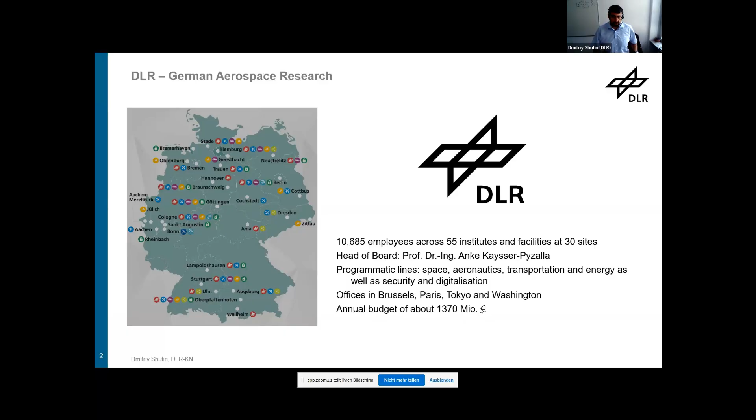But these are kind of the main directions in which we do research. We are, of course, primarily located in Germany. However, we have a few offices that represent our activities also in Brussels, to have a better connection to the European Union, Paris, Tokyo, Washington, and we are effectively a government-funded research organization. We do have some third-party funding, but the main lump of our funding comes from the German government.

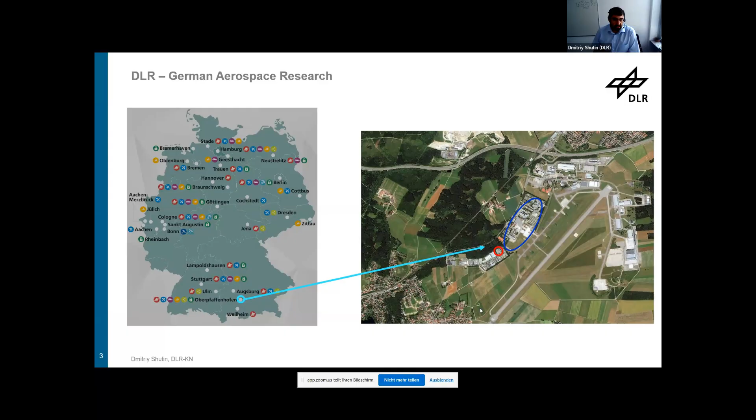My institute is located in the south of Germany. We are very close to Munich. It's in a small village called Oberpfaffenhofen, but basically it's the Munich area, and it's one of the biggest research centers within the DLR. On the campus we have

6 research institutions and a number of scientific technical facilities that provide services to different operations. For example, the German Remote Sensing Data Center is located at our premises. As you can see from the image, there is a small airport from which we also operate our research aircrafts, the Galileo Control Center, the Competence Center for future Galileo systems, and so on. So it's a relatively big research center in the south of Germany.

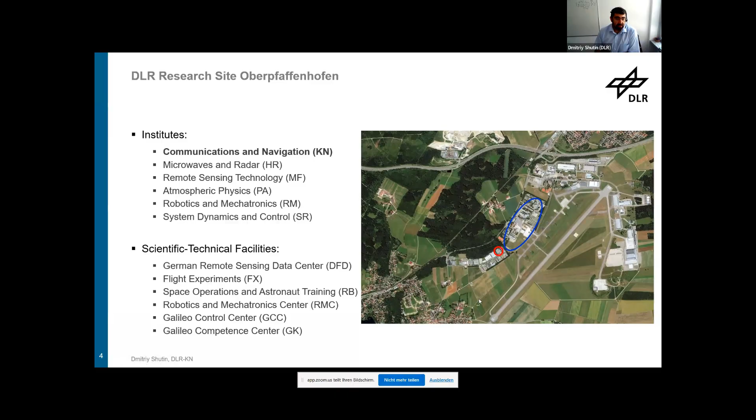Our institute is not the biggest one, but we still have around 230 employees, most of whom are doctoral students and researchers specializing effectively in communication and navigation areas. We do a lot of fundamental research related to these topics, but also a big focus is on experiments, development of practical systems, and testing the systems in real life.

The four major topics on which we work cover, of course, communication, meaning global connectivity, satellite communication systems, development of new communications standards, cybersecurity, and of course global positioning and navigation systems, meaning basically everything related to satellite navigation, GNSS, mainly Galileo, but also GPS, BeiDou, GLONASS.

And one of the topics where we are particularly active is autonomy and cooperation. This is where my group is working. My group is called Swarm Exploration. We are working on developing swarm solutions for different applications, primarily in space and Earth-related applications, and recently security.

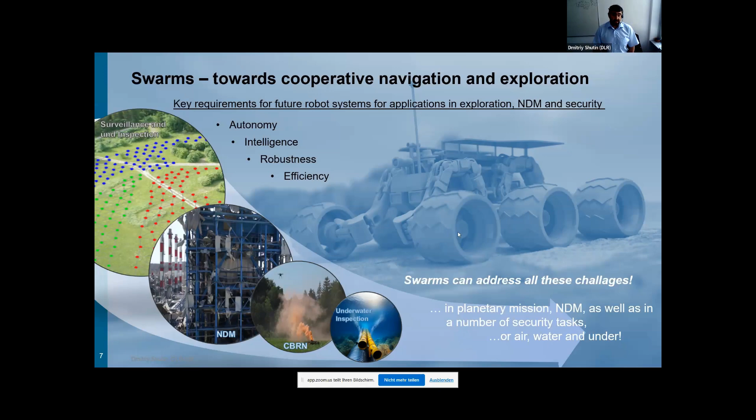So how do we come to source localization, gas source localization? This is one of the topics that we, among other things, look at in the group. And what is the idea, the purpose of this gas source localization?

Imagine a situation in which you have an unknown number of sources that release poisonous gas or smoke from forest fires that you cannot observe directly. You do not know how many such sources you have or where they are situated. But what you can do is take a robotic swarm, equip it with a number of sensors, and utilize the swarm to collect this data, process it in an appropriate fashion in order to identify how many sources we have and where these sources are located.

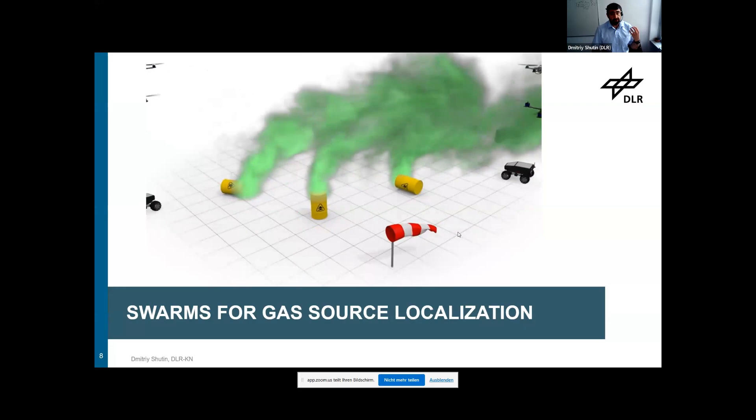This is a task that we set to solve, and this is the kind of approach that we also apply, for example, for exploring forest fires, trying to understand the possible sources of the forest fires, given the measurements that we can collect with ground sensors or flying robots.

So where can you use this technique? Well, of course, search and rescue, that's one of the applications. You could also apply it to monitor or enforce some regulatory constraints.

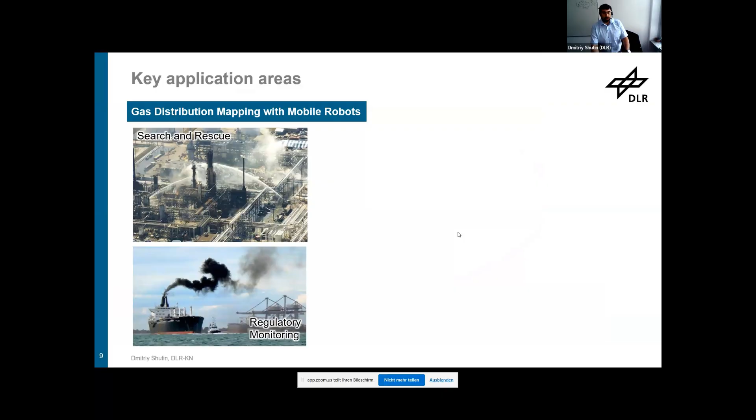For example, on emissions from the ship industry, you can really fly into this plume and take concentration measurements to identify what kind of fuel was burned, whether it's allowed fuel to be used close to the harbor.

Of course, air quality monitoring, especially during industrial processing. Scientific missions is very interesting.

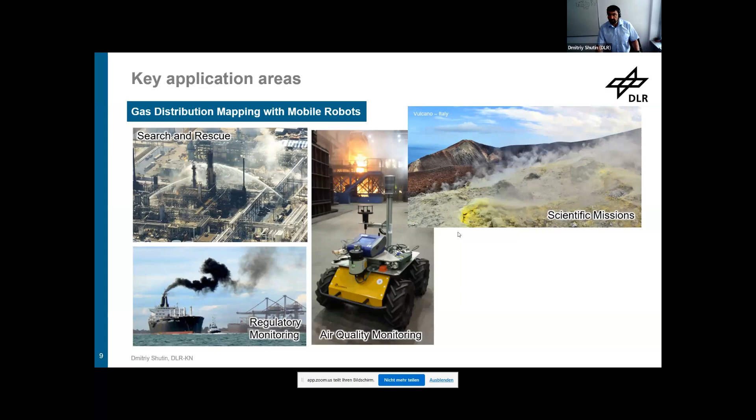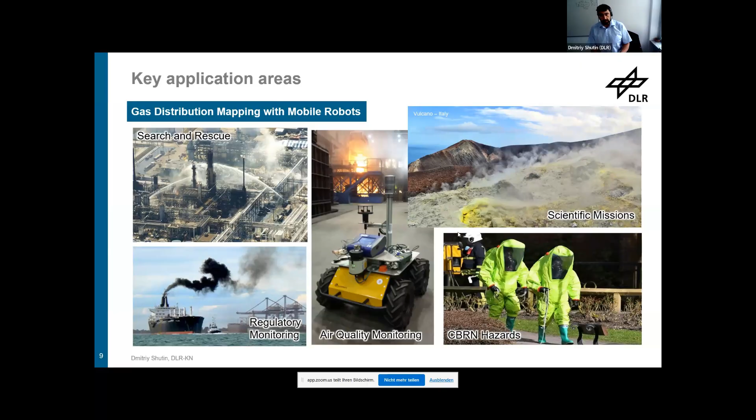And of course, security applications like chemical or biological events that might be dangerous to be explored by humans, but by robots it's actually quite a convenient solution.

How do we approach these problems in general? What is the general methodology that we follow to try to understand how the swarm should tackle or address these problems of source localization?

Well, the two main components that we need to make our system work is, of course, being able to collect measurements. So we need to have an accurate measurement system on the one hand, and on the other hand, we also need to have an understanding of the process that we explore.

Why is this needed? This is needed primarily because we don't have huge databases which we can use to do the training. We don't have the luxury of having a huge data set, or data collected in controlled conditions, with labeled information about the number of sources and their particular location. These data sets are simply not available.

No one has collected them. So we need to compensate this lack of training data by using essentially what we call domain information or prior information. This typically comes from expert knowledge or from physics that explains how these processes we're trying to understand or explore evolve based on universal laws, basically physics. So these are two concepts that are key to our processing.

Once we have the measurements that we collect with our robotic system and the process model, what we effectively try to do is bring these two things together. We try to understand how the model parameters can be identified or estimated based on the measurements that we collected. And that goes into effectively cooperative inference.

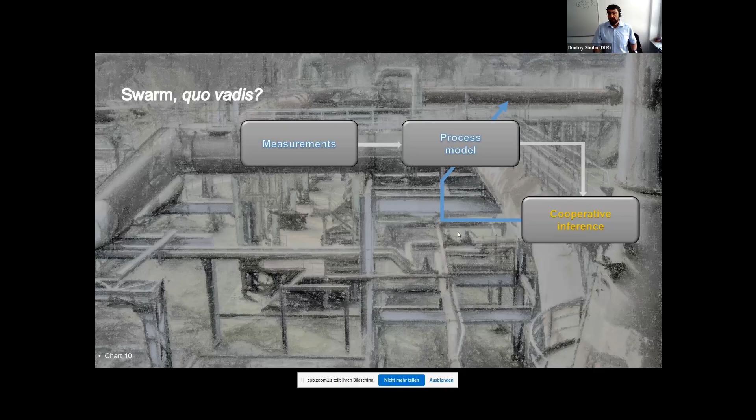We would like to rely on distributed information processing so that the swarm is intelligent on its own, without having one data collection and data processing location that would crunch the numbers. So cooperative inference is another element which is quite important for us. But we go beyond that.

Once we have this cooperative inference algorithm, we also ask ourselves how well we can actually identify the parameters of the model. This is one of the key elements which leads to what we call swarm exploration: how can we utilize the models and data we have collected to better understand what we do not know about the model or the process, given the measurements we already have. This is what we call uncertainty quantification, and you will see examples of how this uncertainty looks a little bit later.

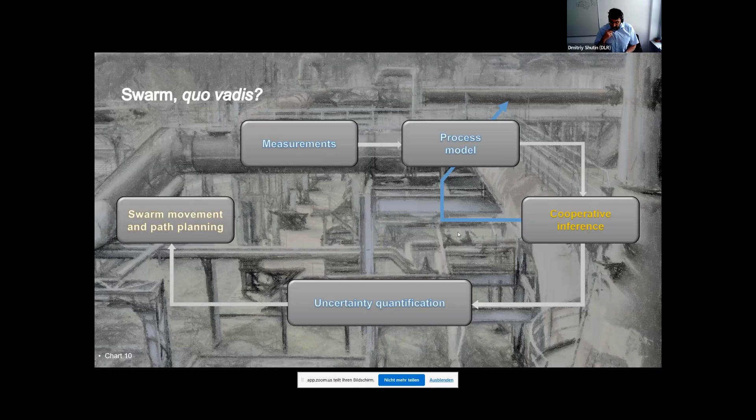This uncertainty quantification is actually the main input into what we call a swarm movement or swarm path planning algorithm, which decides where we need to collect new data, where we have to fly, so that we collect new measurements which improve our understanding of the process, giving us a better understanding of the parameters from which we can derive new uncertainty quantification, find new locations, collect new measurements, and this is how we proceed. This is effectively our key methodology.

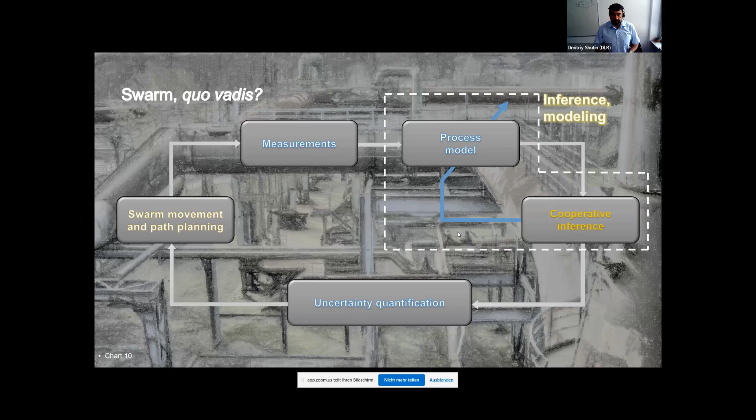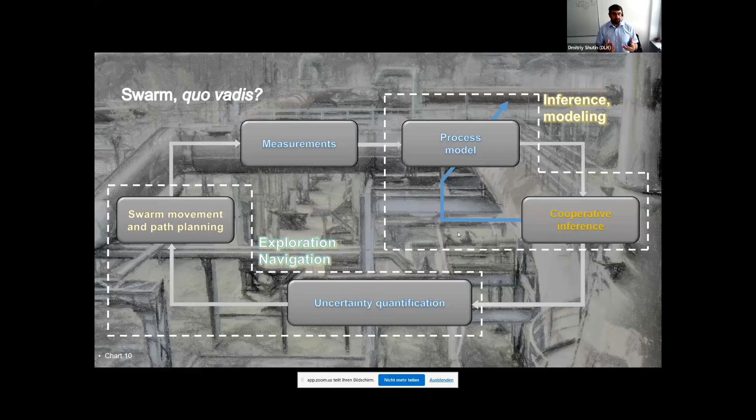This is how all the methods we develop operate on a very abstract level. One part of this process relates to inference and modeling. The other part relates to exploration and navigation. Today I will mostly talk about inference modeling, and lightly touch on exploration and navigation, but mostly focus on cooperative inference and understanding this process, because we are going to talk about sparse Bayesian learning and how to represent this process with multiple sources.

I would proceed with making this scheme, this methodology, a little bit more concrete, and I will begin with the first block, problem modeling. So how do we actually approach the understanding or modeling of source localization? As I said, we do not have a lot of data to train our model, so we need to rely on expert or prior information about the processes and the way we approach the model itself.

One of the approaches we utilize quite heavily in our work is the so-called physics-inspired or physics-based model of gas propagation. Effectively, we know that if we have a certain number of sources distributed in an environment, the distribution of the gas from these sources will be affected by two major factors. The first factor is the diffusion process.

A source effectively puts material into the atmosphere, into the environment — it can be a hot gas, for example. The hot gas expands, and due to temperature differences, that creates a Brownian motion, which is responsible for diffusion of this material into the atmosphere. So if you just have diffusion, you'll basically see a sphere of gas propagating from a source. That's how the gas would propagate from a source in the absence of wind.

Wind is a second, quite important element, which makes sure this gas is transported in a particular direction. In reality, wind is one of the key components describing how the smoke plume propagates. If you look at a ship leaving the harbor, you see the smoke plume coming from it typically goes in one particular direction — that's the wind driving it. Models describing such processes are called advection-diffusion processes, described by partial differential equations that you can see here.

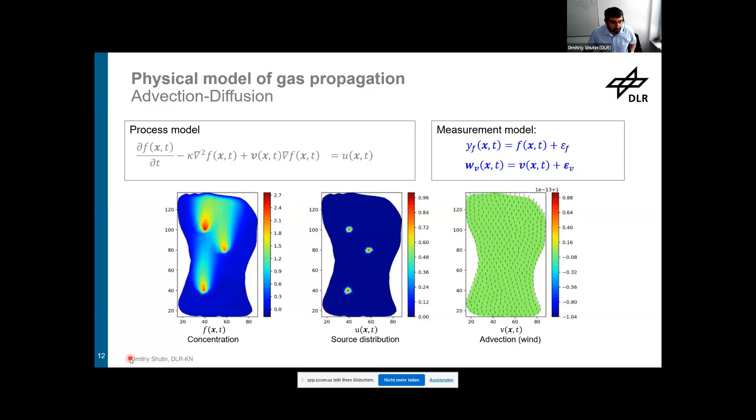Now, how are these measurements constructed? Well, as I said, we equip our drones or ground robots with the corresponding measurement sensors. It can be an in situ sensor, which is directly put into the plume. And this in situ sensor has a certain impulse response, or actually a point spreading function, that tells you how sensitive the sensor is to a particular location.

It's not necessarily direct — we often model it like this, but it has some sensitivity in space. It also has sensitivity in time, so this is not an exactly accurate model, but it's a very good approximation. So we have a certain model that tells us how we measure our concentration, and similarly we have a model that tells us how and where we measure our wind field. This is the measurement system we're using.

As you can see, we're having here a classical state space representation, right? So we have a dynamical model that describes the process change in space and time — that will be our dynamical system. And we have a measurement system that describes how the state, which is our concentration, is observed. So this is the two-layer setup that we will use to describe the process of interest.

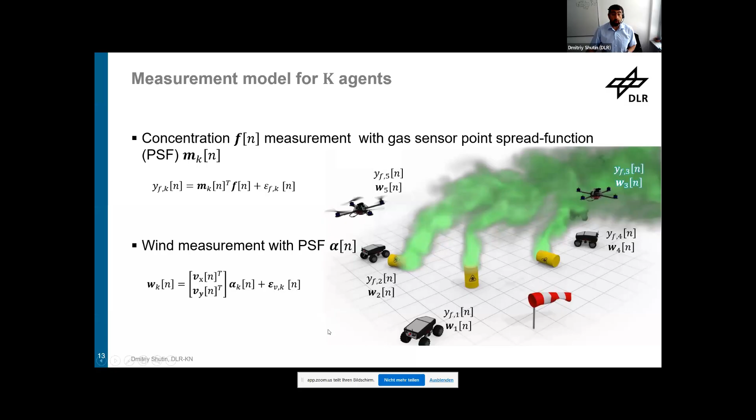How do we actually model the sources? This is our prime objective — we want to identify the sources that drive the whole dynamic process. One of the assumptions we put here is, first of all, let's assume the sources are stationary, so they do not drift in space or in time. This is a simplifying assumption that helps us relax our modeling.

It's not always realistic — for example, for forest fires, we know that the fire propagates, so the sources are moving. But on a time scale that is relevant for the estimation problem, we can treat the sources as almost time invariant.

So effectively, we say the sources, the functions that kind of drive the whole diffusion process, is just a linear combination of weighted Dirac impulses. Every delta here is a measure, a Dirac impulse located somewhere at location theta with a subscript L. So it's an individual source located somewhere in my space. The scaling of my delta impulse tells me how much material this source puts into the atmosphere, like a release rate.

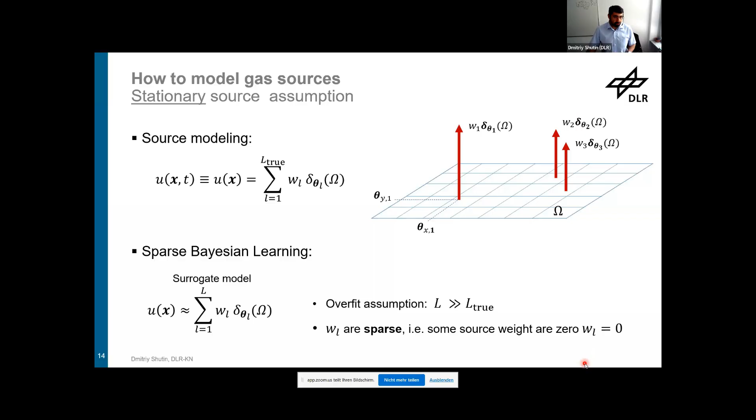So this is kind of an approach that we will follow. All right, so we have now the model, we have now the assumption about the sources. How do we proceed? Today I will talk about two principal approaches that we have tried to address this problem, to identify the sources and their locations.

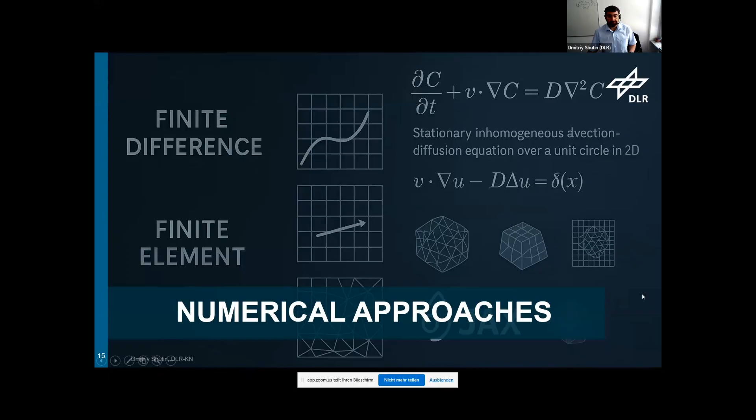One of the approaches is a completely numerical approach. It effectively uses numerical tools to deal with partial differential equations and the whole optimization and learning loops that I have shown before. Later, I will also talk shortly about analytical approaches that we looked at lately, and these turn out to be a bit more computationally efficient, although they bring slightly different types of problems with them. All right, so let's start with numerical approaches.

So here I will try to briefly go over the numerical approaches to solving differential equations. You might have heard that the standard way of dealing with partial differential equations is to use finite element methods. In essence, what finite element methods do is say, okay, I have my functions of interest that I want to estimate, like my concentration f, which is continuous in space and time, and my wind, which is continuous in space and time.

I have my sources, which are continuous in space and time. How do I deal with that? The first step is to say, okay, let us approximate or represent our function using some fixed and predefined basis set.

So it's very similar to a classical Fourier transform, where you represent your signal in time using a linear combination of Fourier bases. It's a very similar idea here, but you do not necessarily use Fourier bases. You use a different approximation or basis to represent your functions.

So the first step is you bring your PDE into so-called weak form. Instead of looking directly at the functions, you look at the inner product of your functions of interest with a function that is typically called a test function, which is selected. So this phi of x is something that you select.

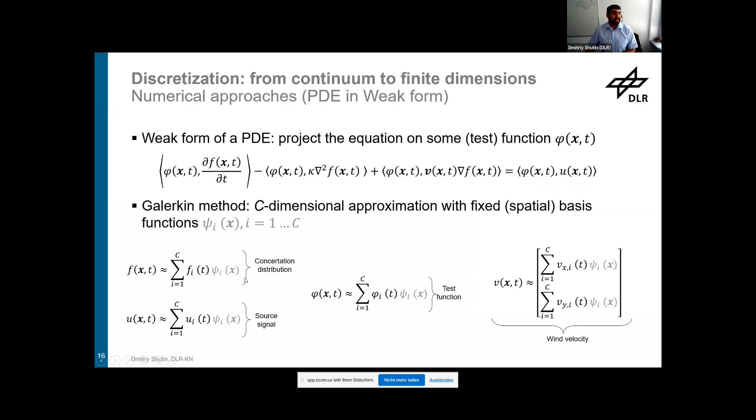The summation of these finite elements will, at the end, give you a reconstruction of the functions that you're trying to estimate. The unknowns in this representation are the coefficients, these time-dependent coefficients which represent a decomposition of your continuous function as a linear combination of these fixed finite elements. So the coefficients we are actually trying to estimate are these linear representation coefficients of our function. These are our unknowns.

And as you can see, they all depend on time. Let me jump back shortly. So we all have this time dependency, and time is still continuous. So these are still continuous time coefficients that are now discrete in space. So we now discretize the space.

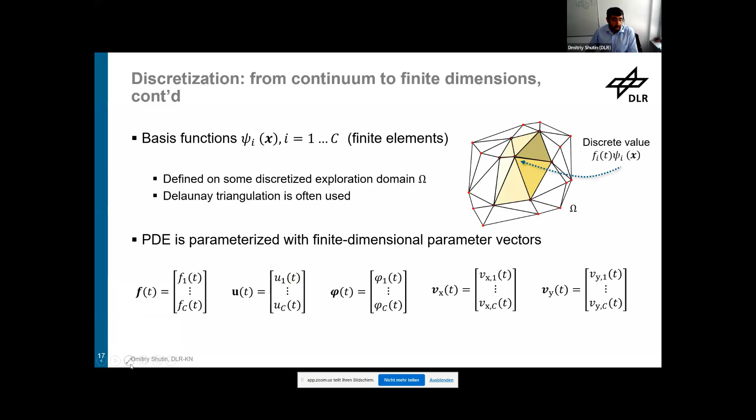How do we proceed? We come back to this weak form formulation where we have inner products between all our functions and the test function. If you write it down and plug in our approximation instead of the function, we end up with a discrete representation using matrices, vectors and matrices that represent all these inner products. We can apply this to all terms: the source term, the time derivative, the diffusion term, the advection term.

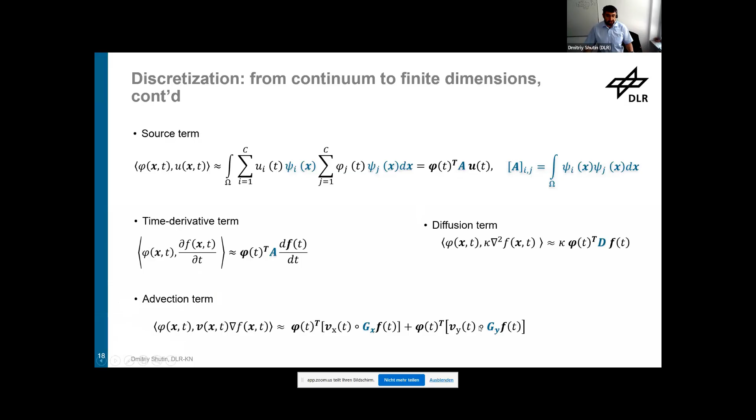We can do all these computations, and effectively we end up with an equation that is continuous in time but now discrete in space. As you can see, we have matrix vector products. It's a somewhat complicated structure, but at the end of the day it's just vector matrix multiplications. The final step is to bring it all into discrete time by discretizing the time. If we do everything properly, we end up with a difference equation that describes our advection diffusion now in a discrete domain.

So we now have a state space representation, which is no longer a partial differential equation, but a difference equation in space and in time. The vector describes our discretization in space, and that starts to look a little more like a classical Kalman filter state equation. We have a state at time n, which depends somehow on the state at time n minus 1. So this is the direction in which we are going.

And of course, we need to also introduce a boundary condition for the partial differential equation, which basically extends the state space with additional variables. But that's just a minor thing, not that important for our discussion. What is important is that we take a continuous equation in time and space domain and effectively bring it into a difference equation over a large state space vector, which describes our state or system in space now.

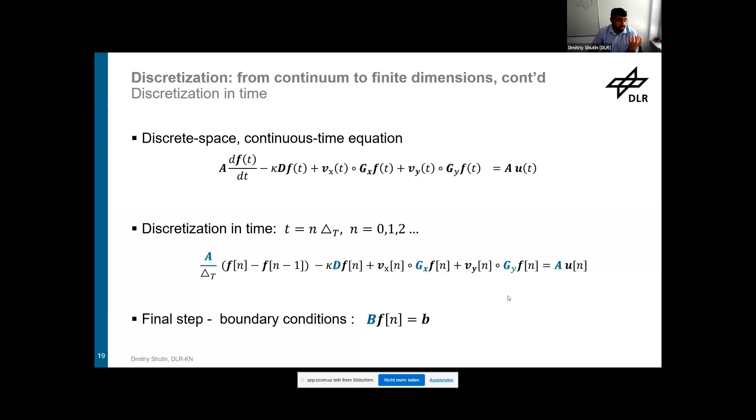So we now have basically a fully discretized equation. How do we proceed from there? Well, as I mentioned, we are going into sparse Bayesian learning. So how does sparse Bayesian learning work? It's a Bayesian approach, so we need to get rid of this classical standard deterministic approach and put everything into a probabilistic framework. How do we do that?

Well, first of all, we say our equation, so our advection diffusion or PDE equation, does not hold exactly at zero, but rather it has a certain residuum. So it holds approximately, and the residual signal follows a normal distribution.

So we say the concentration value that we obtain effectively describes a certain probability distribution. So it's a probability of our concentration, which is conditioned on the wind and the sources. If we know in which direction the wind blows, and where the sources are and how many we have, effectively we can just solve the equation by iterating it, and then we have a solution. It's a forward solver, quite simple. And if we solve the equation, we'll get our concentration.

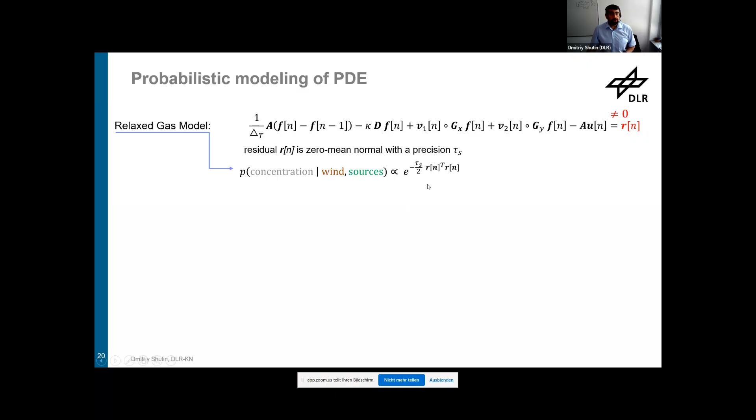But of course, the equation does not hold exactly, so we say that the residuum that remains is random. And that gives us our probability distribution over the concentration value.

Of course, we have measurements, right? So we have our robots that measure winds, that measure the concentration of the gases, and that give us effectively what we call the likelihood. So that's a probability of a measurement, which is conditioned on knowing the wind vector and the concentration. Again, that's given by our measurement equation.

And this is where the sparse Bayesian learning comes from. We need to also define the prior distribution for the wind and for our sources. So if we start bringing all the pieces together, we would like to estimate concentration, wind, and the sources given our measurement. So we would like to come to a posterior distribution of these unknown parameters given what we measure.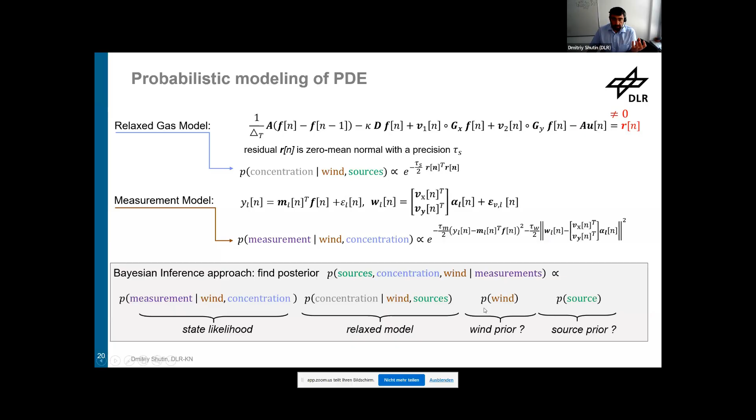And if we write down this posterior distribution, we see that it will actually contain a state likelihood, which tells how our wind and concentration impact our measurement. So that's our measurement model. We'll have our partial differential equation model now in a probabilistic context, which tells how the concentration probabilistically depends on the wind and the sources. And finally, we need to specify a little bit of a prior about the wind and the sources.

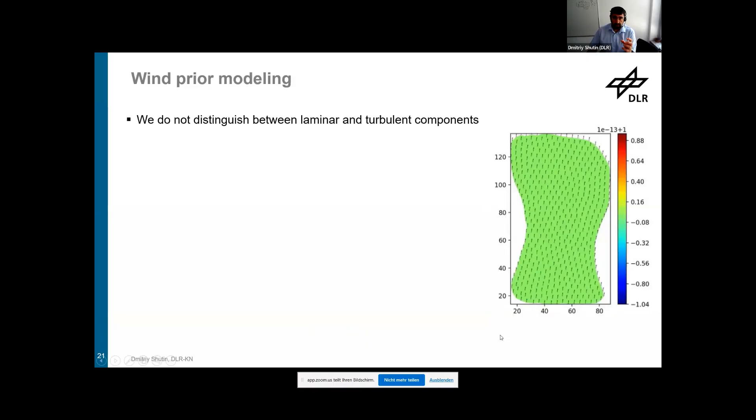So let us look a little deeper into that. For wind modeling, we typically follow a very simple assumption. We say, well, we first of all do not distinguish between laminar and turbulent components, which is a huge simplification, but we need to do that because otherwise we would also have to deal with the Navier-Stokes equation, and that would make our life really, really difficult. So we use a simplifying assumption by saying there is no turbulence.

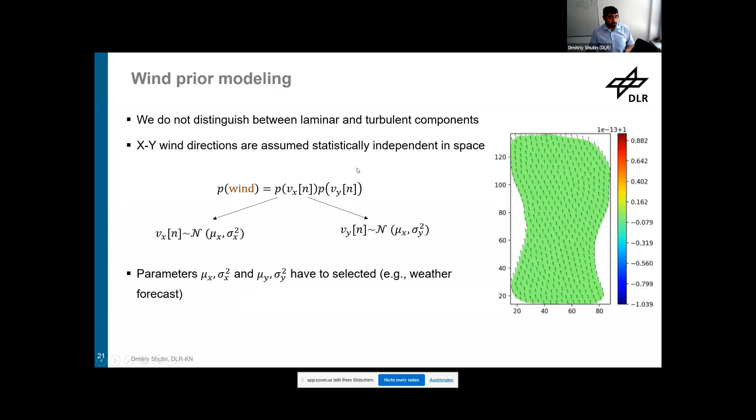And we also say that the X and Y directions of wind are statistically independent. This is one of the main approaches that we follow. The only thing that we need to know is the mean of the wind and its variance, and these are parameters that need to be selected for the prior. These can actually be obtained, for example, from the weather forecast. So we know the dominant wind direction, and we can use this information from the weather forecast to construct these priors, and in this way define the prior for the wind.

For the sources, this is where the sparse Bayesian learning comes into play. So how do we model sources? When we started with the discretization in space, we have a vector U, which describes where our sources are, and this is the discretization that we have chosen before. And of course, it depends on time, so we will have a vector describing sources that might change in time.

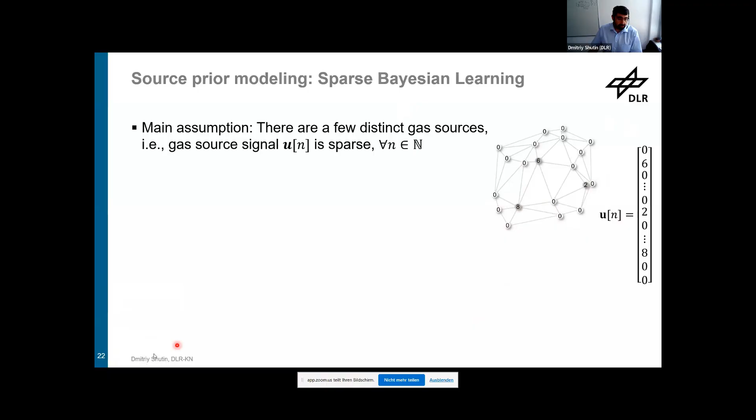So our main assumption is that we have a lot of sources, but some of them are non-zero, the rest is zero. This is what we call the sparsity assumption, so the source vector is sparse. That implies if we look inside this vector, we see a lot of zeros, and only on some locations are non-zero values, which you actually see here. This is a non-zero value, this is a non-zero value, these are all zeros, and this is another non-zero value. So we have a vector with n components, a very large vector describing the whole discretization of our spatial domain, but there are only 3 components that are non-zero. So this is how we model it.

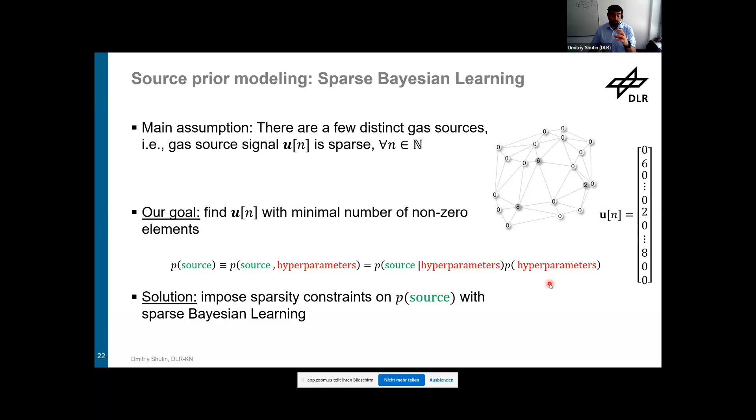Our goal is to identify which components will be non-zero here. Sparse Bayesian learning does this indirectly by introducing a hierarchical prior that will result in an estimate that is sparse. This is done by introducing additional parameters called hyperparameters. These hyperparameters control the contribution of a source to the model, so it's actually these hyperparameters that decide whether we have a source or not. This hyperparameter will have a strong resemblance to a detector. Effectively, its value will tell us whether the source has to be set to 0, meaning there is no source, or the source is non-zero, and then we'll have a value that we will use as an estimate of the source release. So this is how sparse Bayesian learning operates in order to identify which sources are relevant for us.

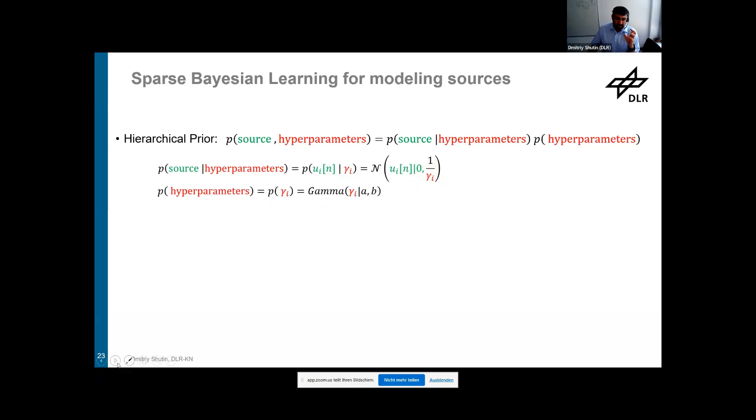Let us look a little bit more into detail on how sparse Bayesian learning works. Effectively, we construct this hierarchical prior, which consists of two contributions. One is a Gaussian contribution, which says that the source value given this hyperparameter gamma is a Gaussian with 0 mean, and it's actually a variance, not 1 over gamma. It's just gamma times I, which is the variance of this parameter. And this hyperparameter itself follows a gamma distribution. It's a slightly strange combination, but if you look at how this hierarchical prior actually works, or what is an equivalent prior that you use, you can marginalize over gamma, and you find that this is actually a Student's T distribution.

What is important here is that if you look closely, it actually looks a little bit like an L0 norm. If you plot an L0 sphere, you would see that it's a pure cross. An L1 sphere would be rotated, it would be a rhombical structure, so it would go basically like this for L1. The Student's T is something in between, so it's a kind of distribution that places probability mass along the axis, and that's what will effectively make the estimator sparse.

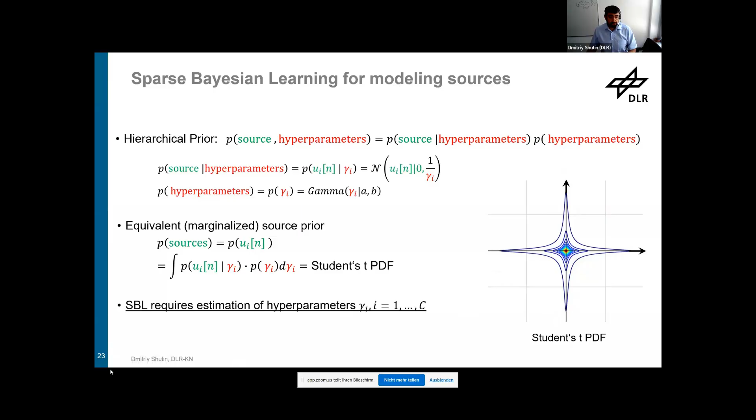And that's typically the solution you get if you use a pseudo-inverse in MATLAB, or ridge regression in Python or MATLAB, doesn't matter. That's the solution you would obtain with ridge regression. As you can see, it is not sparse.

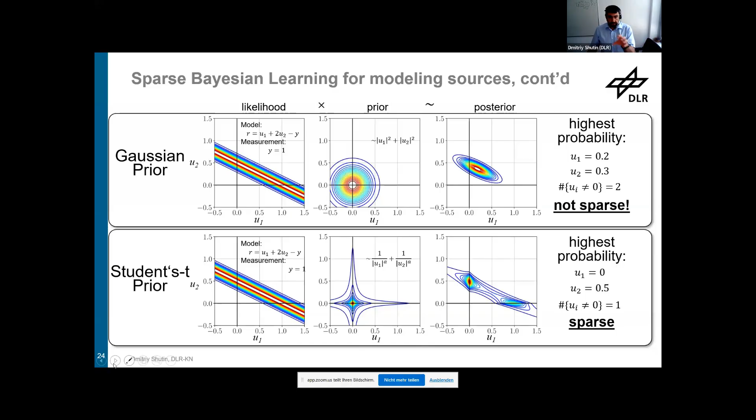So this is the kind of approach we are going to use, and why sparse Bayesian learning can be used not only to obtain a sparse solution, but also to identify how many sources we have.

So now let me walk you briefly through the estimator. Of course, we now have a lot of parameters that we want to estimate. We have the sources unknown, we have concentration that is unknown, wind, hyperparameters, only given measurements. And all these parameters are given by the corresponding probability density function.

So the model fit is given by our measurement equations. The model is our PDE, sources, and hyperpriors - things that we have just defined.

One approach to model this system is to use the classical hidden Markov structure, right? So we have the initial state of our concentration, which transitions to another state because we have a time-varying process. We have some measurements of the concentration.

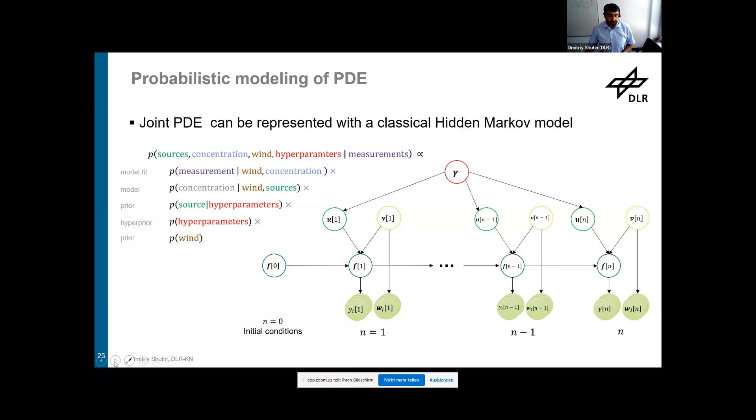We have some measurements of the wind. And if you bring all these parameters together, we have a dynamical system that tells us how our concentration will change over time. And our goal, of course, is to estimate these parameters.

So we need to run an inference over this model. And one of the ways to do that is to use factor graphs, because everything factorizes quite nicely. So the solutions we have developed for this type of problem are factor graph-based solutions.

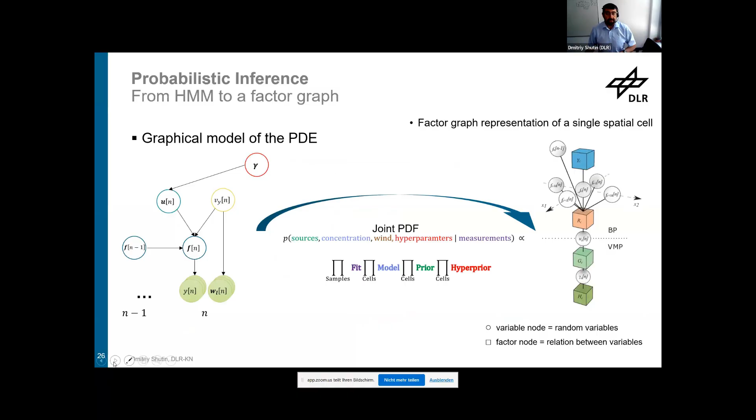The advantage of the factor graph is that you can derive messages that you need to send between factors. By transmitting the messages between the factors, you can then identify the marginal PDF of the variables of interest - the concentration, the source values, or these gamma hyperparameters.

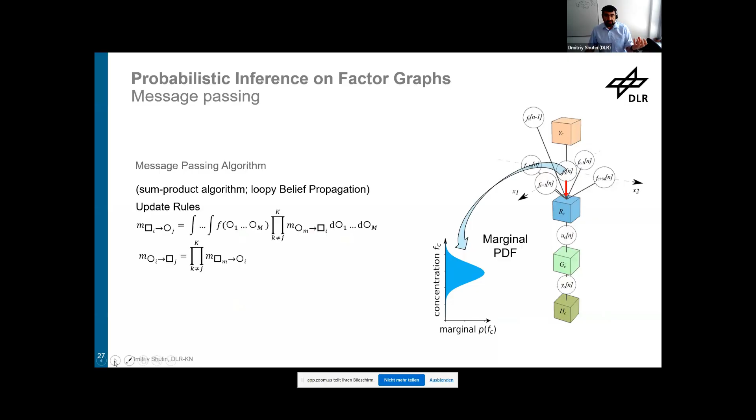So you can obtain an estimate not only of the mean values, but you get the distributions. And that's quite important because it takes us from the model fit to uncertainty quantification, since the distribution of the parameters tells us how uncertain our parameters are.

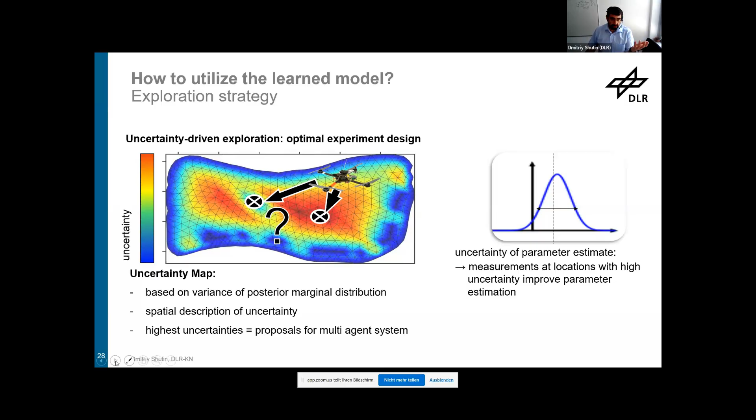And since the parameters actually represent coefficients over space - discretization coefficients that represent our spatial or continuous functions - we can plot the distribution of uncertainties over the space that we are exploring. And this is the tool we use to define the exploration strategies.

So how is the exploration strategy defined? We have this probabilistic inference that utilizes a factor graph by transmitting messages. Of course, we feed the measurements into the system.

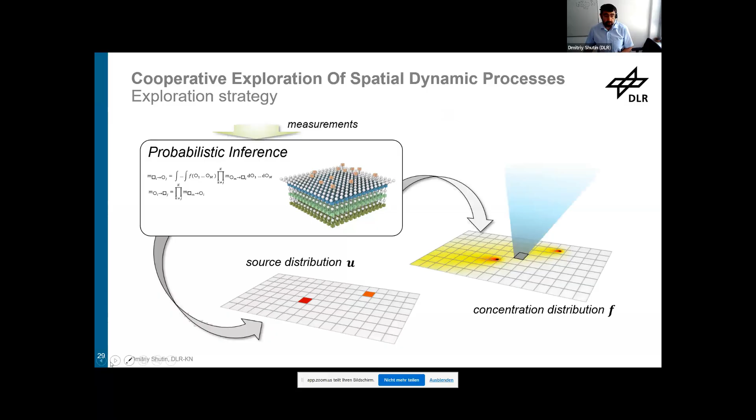And by doing this probabilistic inference, we come up with the source distribution - so the means of the estimated factor graphs or factor values - but also with the concentration distributions, and also with uncertainties, because we know not only the mean value but also the whole distribution.

And what we can do now is actually measure the size of this uncertainty and say, okay, every cell will now have a different uncertainty - some will be higher, some will be lower. So those uncertainties that are high are interesting for us, because this is something we do not know about our parameters, so this is probably where we want to go and measure.

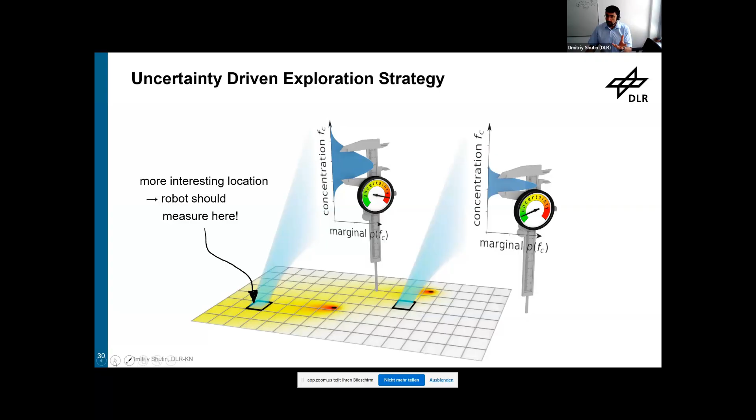If the uncertainty is low, then our measurements have sufficient information about that particular value - we don't want to measure there. And this is the strategy we follow. How does it work in practice? Well, this is a simulation now where we say, okay, we have a wind, which we say we know.

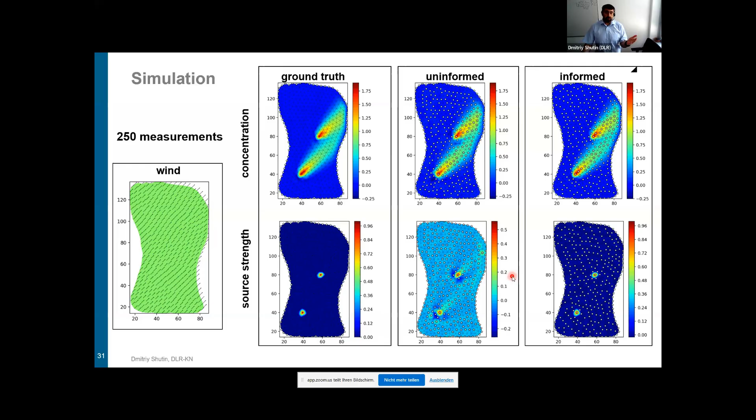almost after 250 measurements. So it's effectively a factor of 5 that you save if you do this information-driven approach.

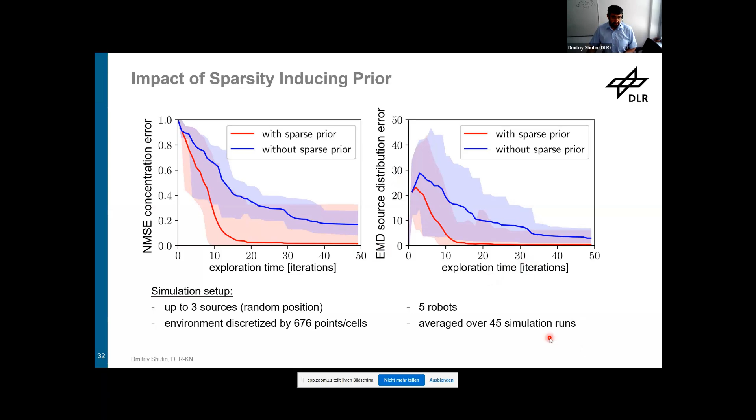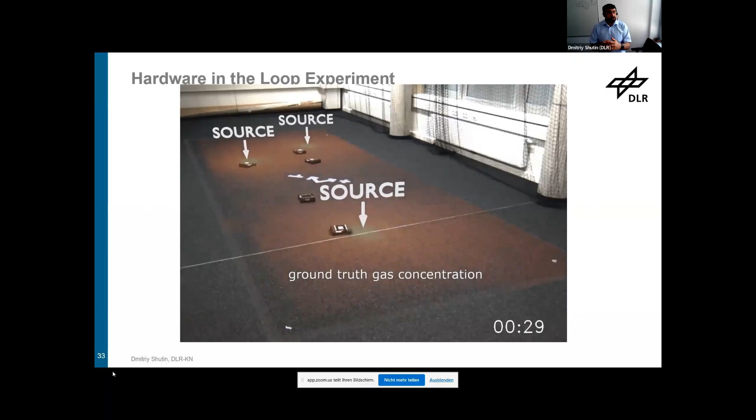This is just a small example of the strategy running in an experiment. We have here 5 robots that implement this strategy in real time. It's a decentralized approach, so the robots do not send the data to a communication center, and they do not know where the sources are.

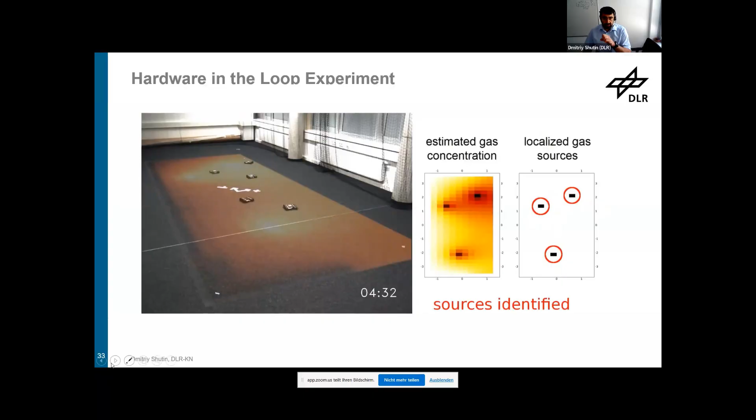Of course, it's a laboratory experiment, so the measurements of the gas concentration are synthetic. We just take the corresponding concentration measurement from a simulation. But as you can see, after roughly 4 minutes, we are able to identify the true number of sources and their locations. Although in the beginning, the number of sources changes, at the end of the day the true number of sources and locations are identified quite accurately.

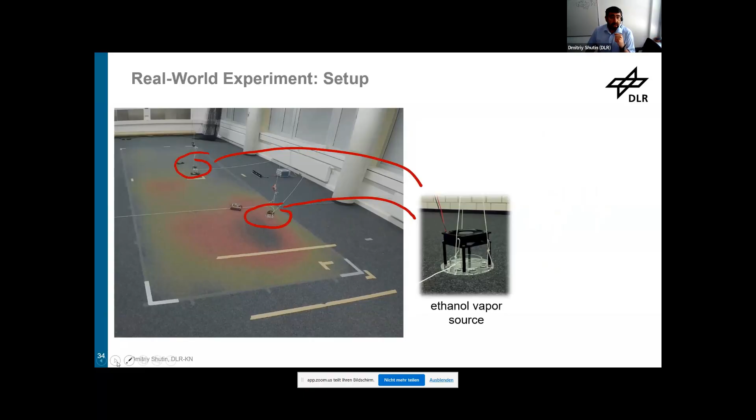We repeated these experiments also in the laboratory with real gas. What you can see here is ethanol, and robots carrying ethanol sensors. It worked actually quite well. It's of course not as fast, but let me now just go briefly through the

experiment. So you start again collecting the measurements, following the exploration-driven approach, trying to estimate both locations and concentration. You also try to estimate the wind at the same time.

As you proceed, you see that you start identifying the first source, which is slightly off from the real one, but it's basically within one discretization cell of the real source, so they are pretty close. Then after 11 minutes, you identify the second source, also quite accurate.

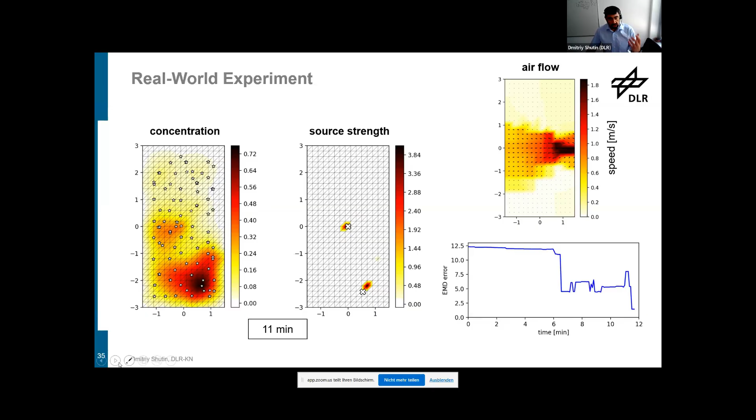So the method works both in simulations with hardware in the loop as well as with real data. But that, of course, requires solving these partial differential equations numerically.

If you start increasing the dimensionality of your domain, it turns out that you need a lot of discrete cells, and all of a sudden the dimensionality of the problem becomes quite significant. So the question is, is it possible to make it more efficient, to get away from solving partial differential equations numerically? This is a relatively new approach that we follow, and I call it an analytical method, but in fact it's semi-analytical, and I'll explain what I mean by that in a minute.

So what's the idea behind doing these analytical methods? One of the disadvantages of gridded methods or numerical approaches is that your vector representing your sources has a dimensionality tied to the discretization of your domain. If you think about even a modest domain you're trying to approximate, like 1,000 meters by 1,000 meters, and discretize it with 10 meters per cell, which is a relatively large cell size, you end up with 100 times 100 cells on the ground. And if you go into a third dimension, all of a sudden you have 10,000 times the discretization.

Every number in these vectors is an unknown, and basically, to estimate an unknown, you need a measurement. Of course, we have regularization, the sparsity-based regularization, so we don't need as many measurements as unknowns. But it's a huge number of unknowns, so we need a sufficient number of measurements to get reasonable estimates. So the numerical complexity of this approach is that the number of measurements tends to grow quite fast for large models.

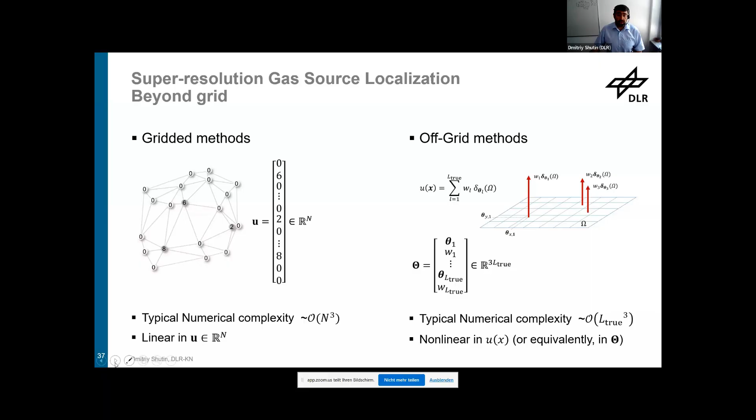Does it pay off? Yes, in some senses, in some cases, but not necessarily, not always. So there are trade-offs. But in general, in some cases it can indeed be very useful and significantly more efficient. So how do we approach an analytical solution if we go off-grid?

One of the analytical methods to solve PDEs is the so-called Green's function-based method. So what is a Green's function? Effectively, it's a concept well known to any engineer who had a course on system theory or linear system theory, because if you think about a linear time invariant system, the first thing you learn about those in theory is the impulse response. What is an impulse response?

If you have a linear time invariant system and you kick it with a Dirac impulse, the system produces an output which we call an impulse response. If the system is linear time invariant, it adheres to the superposition principle, so we can predict or compute the output of the system to any linear combination of impulses by just linearly combining the corresponding impulse responses. So the system can be studied in terms of this impulse response.

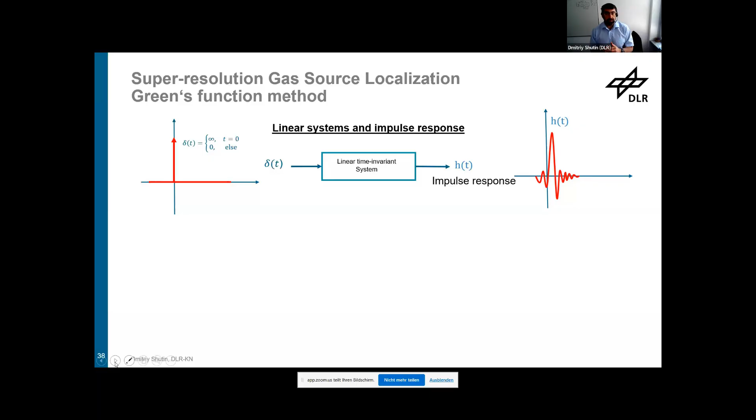The Green's function is nothing different. It's effectively the response of a linear partial differential equation to an impulse, which is now a Dirac in time and space. The system response is more complicated in this case, but it's still a response of the system to an impulse, and this is what is typically called the Green's function.

A complication in connection to the impulse response is that it will typically depend on the particular partial differential equation, and more strongly depend on the particular domain in which this partial differential equation is computed. Unfortunately, these functions cannot be computed for arbitrary domains and arbitrary partial differential equations—they exist only for certain domains and certain equations.

At this moment, can you please confirm that you can hear me? I had an incoming call and I'm afraid the connection got broken. Hello? Yes. Okay, so I will continue then.

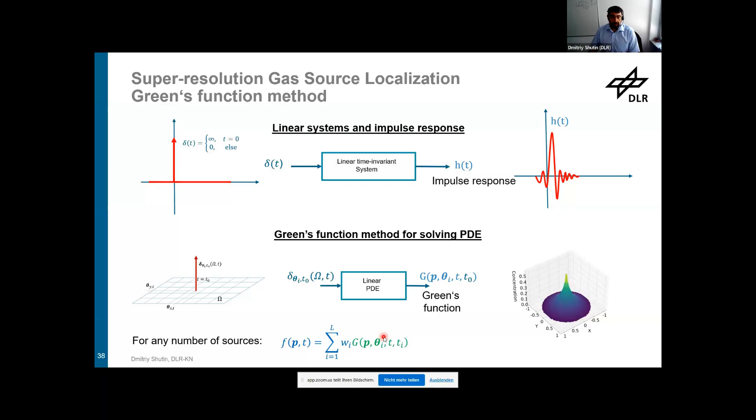Let us go back to our partial differential equation, where P indicates the position in space and T stands for time—the same equation as before. Its right-hand side is a sum of Diracs, subject to some boundary conditions and initial conditions. For example, we say at the boundary our concentration disappears, and at time moment zero we had a certain concentration level in the room.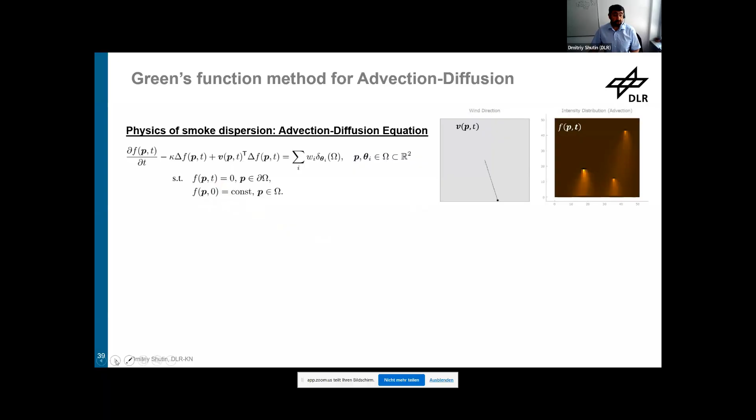This would be kind of a numerical solution that you see here. Unfortunately, that would already be a case where you cannot compute the Green's function analytically—that's where computation of the Green's function becomes impossible in general.

You can, however, simplify it by saying, for example, that your equation is time invariant, so you consider a stationary case. You also say that the domain over which you compute your function is infinite. In this case, you can actually find a Green's function.

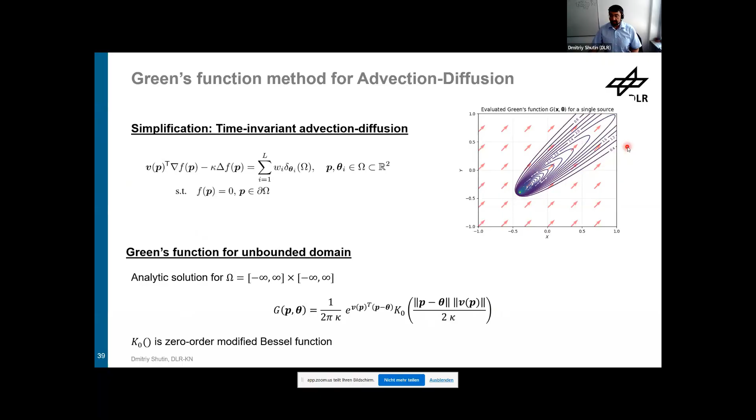And it is shown here. It has a relatively complicated form, but effectively it's a form that you can still compute analytically, and you could see how it will look—how a response of this function will look for a single source. So you have a source here, and you see these contour lines that describe how the concentration changes in space.

You can then use this Green's function as a solution. So you again discretize your space, using finite elements or any other discretization you want. You collect your concentration in a vector, you collect your Green's functions in the corresponding vector, and you construct a solution as a linear combination of these Green's functions—but you do not locate your Green's functions on the sources on the grid.

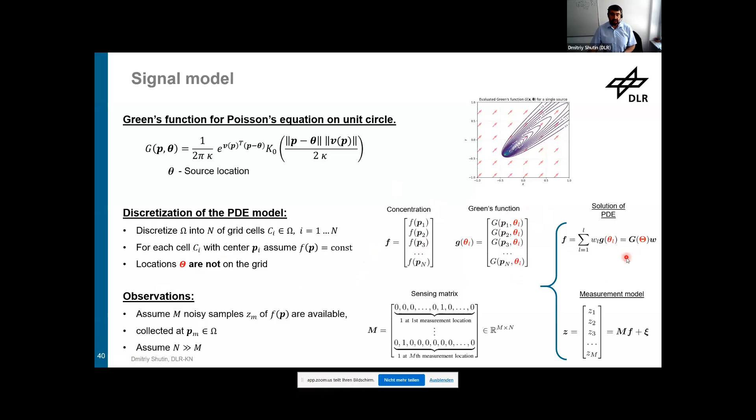Again, you have a very similar observation matrix as we used before—this is a very similar step. Again, you have a kind of state space representation: you have dynamics described by your Green's function now, and you have your measurement model which describes your measurements. This is an input into using the same approach as we used before.

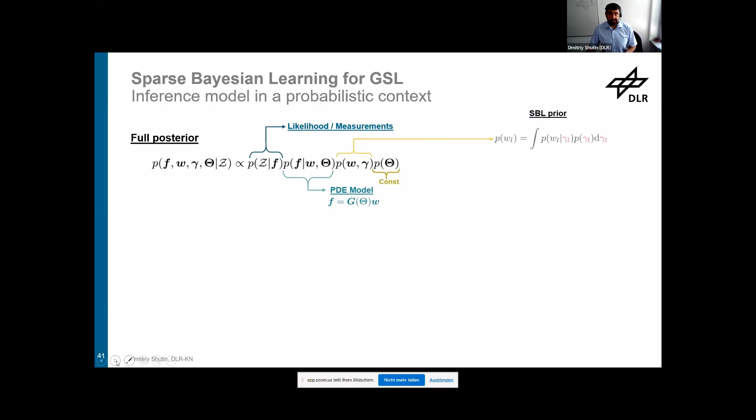So it's the same probability density function, which contains the likelihood and measurements. It contains a PDE model, which we now describe in terms of the Green's function. It has this constant, or any other prior assumption about the source locations, and we have this SBL prior that we also used before.

The optimization strategies we use here involve a nonlinear optimization with two steps. The first step is a standard sparse Bayesian learning, as before, with the source location fixed. We fix the location of our sources, assuming they are known, and apply sparse Bayesian learning to identify which sources are active and which are not.

We start with a very large number of sources, like 1 million. We fix them, do the sparse Bayesian learning, and identify which sources are zero and which have a non-zero release rate. Then we go into the nonlinear optimization problem, where the support is fixed. We work only with active sources, but now allow them to move through our exploration domain to find new locations. For these relocated sources, we do SBL again. This is an iterative, nonlinear scheme, but it seems to work.

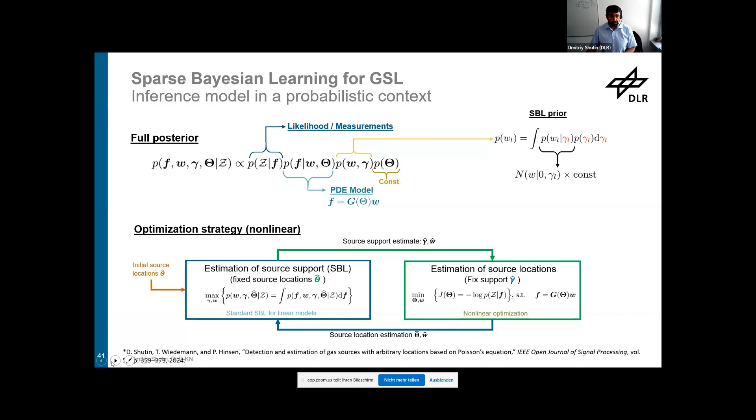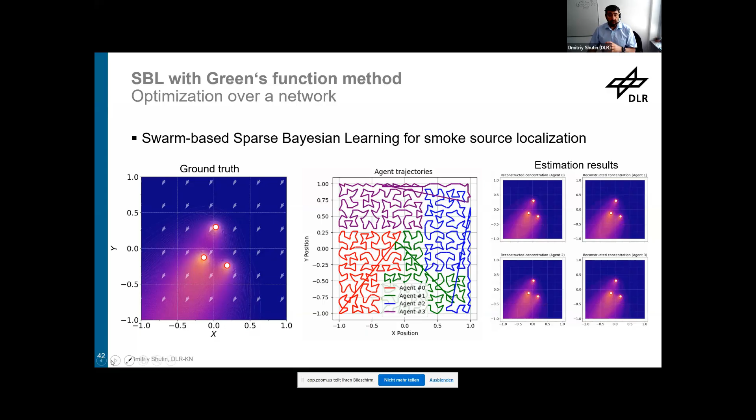Let me show how this optimization is solved in a distributed fashion. Here you see three sources, fixed wind information going in one direction, and four agents covering the whole exploration domain. These curved trajectories cover the whole space, and on the right side you see how the number of sources changes as more information is collected. We start with a very large number of sources, and as we relocate them and perform sparse Bayesian estimation, the number slowly changes until we end up with the exact correct number of sources at the correct positions, making the estimation correct.

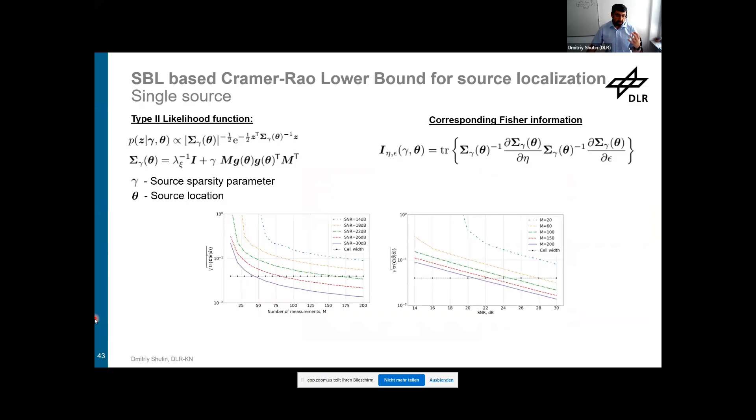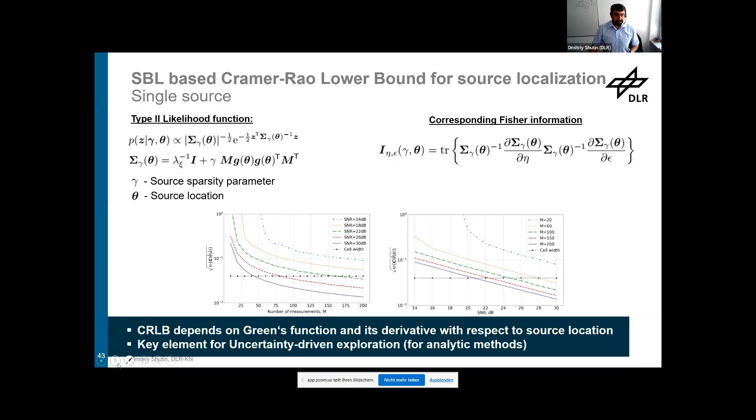You can go a bit further and analyze this estimation problem theoretically. You can derive Cramér-Rao lower bounds, which tell us how accurately we can estimate the sources, how many measurements we need to collect, for example with accuracy comparable to our discretization. Most importantly, we can compute these characterizations based only on our Green's function solution, the solution of the equation. We can use this information for uncertainty-driven exploration, equivalent to the information-driven approach we developed for numerical methods, but now for the analytical methods in hand.

I'm almost at the end of my presentation, so let me summarize. I know it was a lot of information, but I hope you got the main message: you can approach these problems from a numerical perspective, and also develop analytical methods to identify the number of sources using non-visual information. In both cases, you can derive information-driven strategies to guide robots to better sampling locations, which can significantly accelerate source identification by collecting more informative data samples. Both strategies can be implemented over a network of agents, without requiring a centralized computer, making them well scalable to swarms.

Green's function methods are very effective; however, you cannot really compute them for arbitrary domains. You need to approximate the solutions, and neural networks can be quite effective at this. We are currently looking at physics-informed neural networks to approximate Green's functions for general domains, as well as Fourier neural operators, which are particularly well suited for partial differential equations.